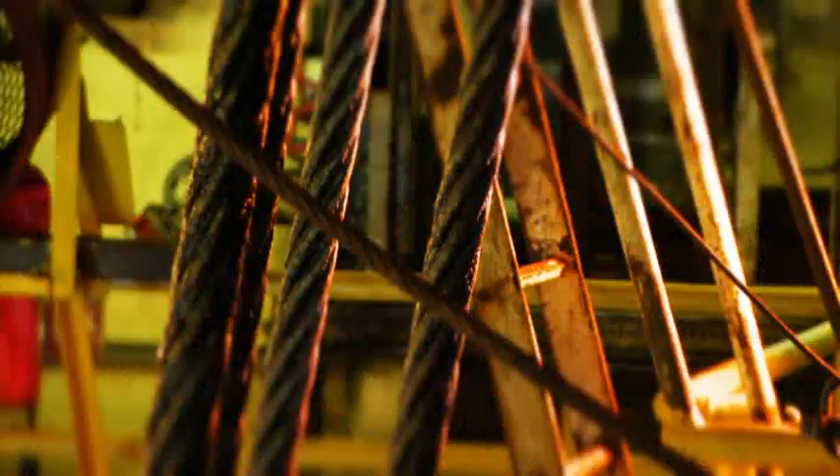For several decades, exploration teams searched for significant reserves of oil off the coast of Ghana. And what they finally found exceeded all expectations: one of the largest oil fields ever discovered in West African waters.

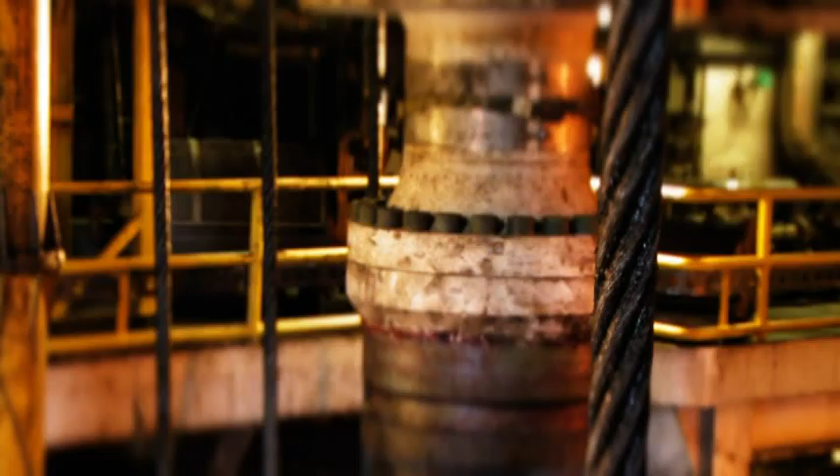The results that we were getting from the initial well that was drilled were very exciting, very thick reservoirs. I do believe we have an outstanding field here, maybe the best field I've ever worked on. It was a really neat well when it came on and when we DST'd it. Good flow rates, good reservoir quality. Everybody around here was very excited.

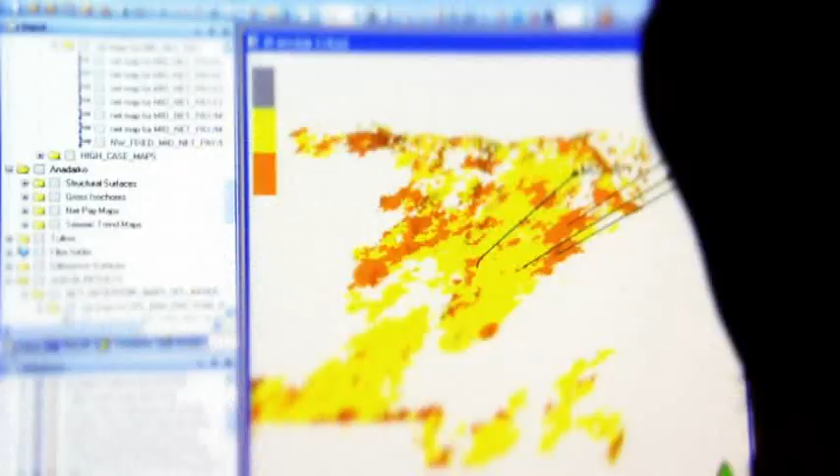Three years later, and the reservoir is poised to surrender first oil. We realized we had a sequence of reservoirs, stacked horizons that spanned 12 kilometers. These reservoirs are capable of anywhere from 15 to 25 or 30,000 barrels per day.

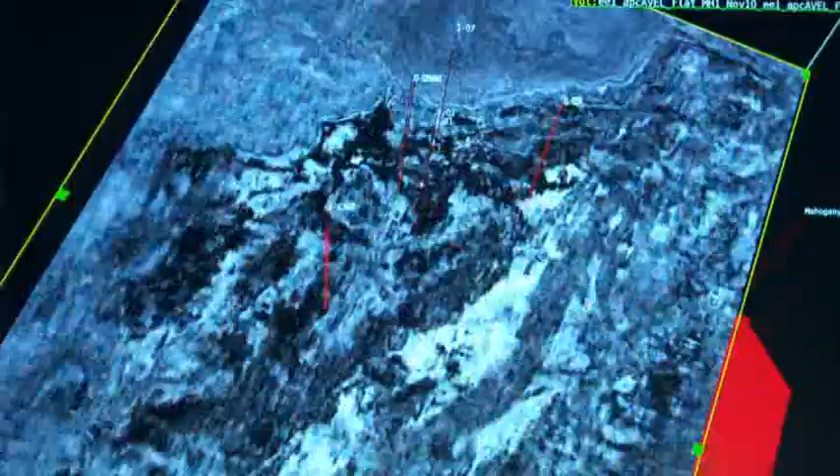This oil is probably the most ideal oil you can have. Compared to heavy oils or sour oils, it's great quality crude. The 23rd of June 2007 marks the discovery of this remarkable field. It was soon to be named Jubilee, to celebrate 50 years of Ghanaian independence.

Realizing the enormous potential of the find, the decision was taken to fast-track the project to bring the field online as quickly as possible.

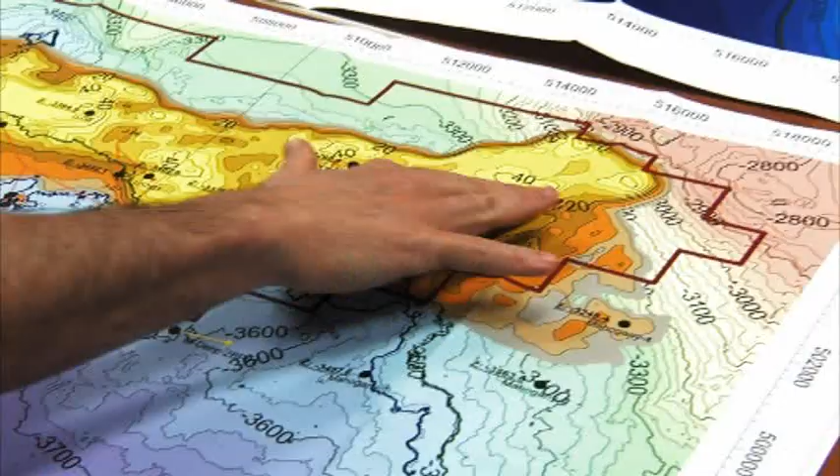The first step was to assemble an IPT, or Integrated Project Team. It was working with three different companies at the same time, all part of that group: Anadarko, Tullow, and Kosmos, in three different locations, without a lot of information, and it needed to be done very quickly and very accurately. We did a very good job of integrating representatives from GNPC, the Ghana National Petroleum Corporation, into the IPT, working with them, establishing guidelines.

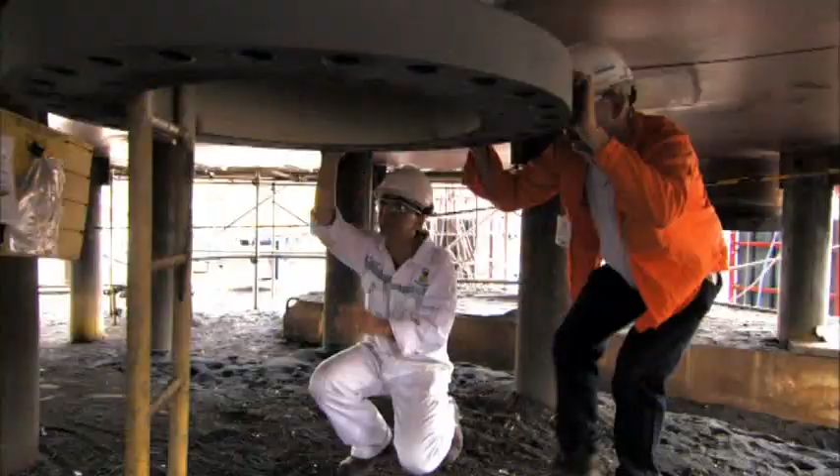The rules and regulations they are now creating are based on our working relationship with GNPC. We went to great lengths to hire the right people. Once we got them on board, we made sure that everybody was communicating with each other. Because we had a lot of good people working on the project across all the parties involved, they very quickly came up with the best solution, which management for all three of the bigger companies and the Ghanaian government were able to buy into.

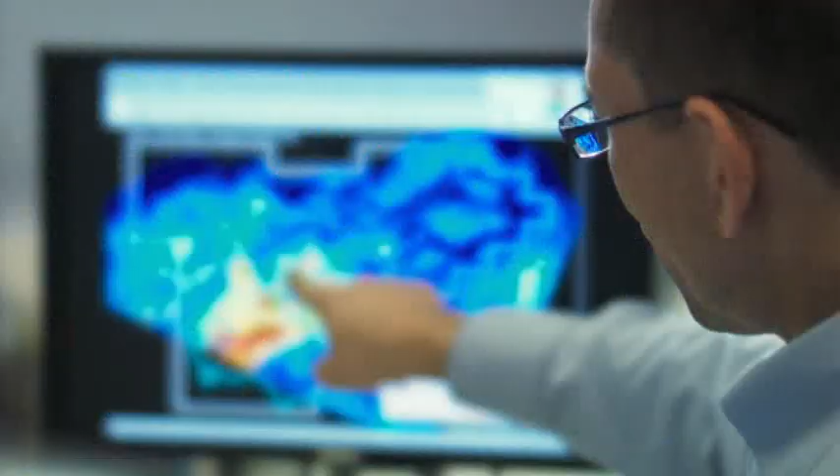Tullow now began building various teams to put their plans into action: its in-country team in Ghana to prepare infrastructure, the drilling team to drill the wells, and later the production team to receive the project from the IPT.

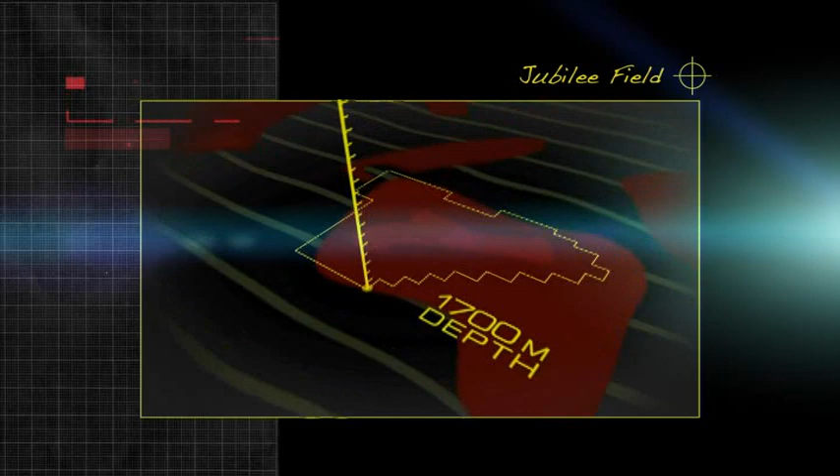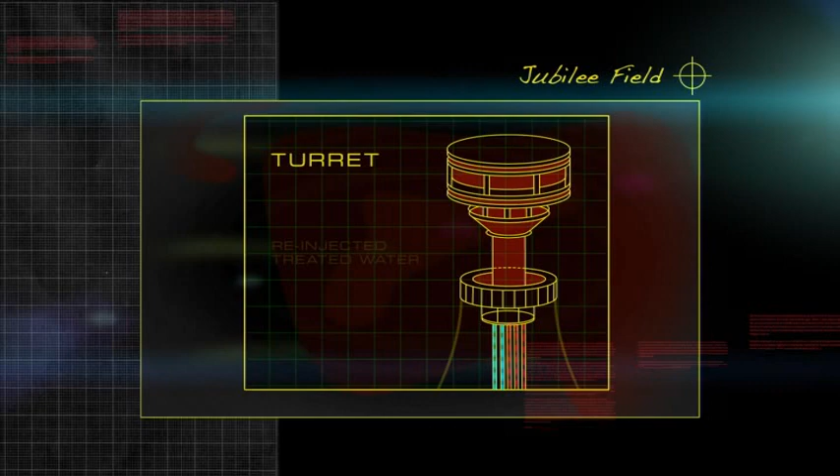At its deepest, the Jubilee Reservoir lies beneath 1,700 meters of water. To bring the hydrocarbons to the surface, the IPT will need to drill as many as 17 wells. As well as those producing oil, there'll be others to inject water and gas back into the reservoir. The purpose of this is to maintain pressure, raise reserve levels, and minimize gas flaring.

It's never an easy problem in 4,000 to 5,000 feet of water, but the industry certainly has learned how to do that well. You simply have to engineer it very carefully. You have to put together very good, proper procedures. And then, of course, you have to have equipment and people that know how to do that. And we did contract among the best contractors in the world.

In the next decade or so, a significant number of additional wells will be drilled, not only to infill the first phase of drilling, but also as we develop other reservoirs that we haven't as yet touched.

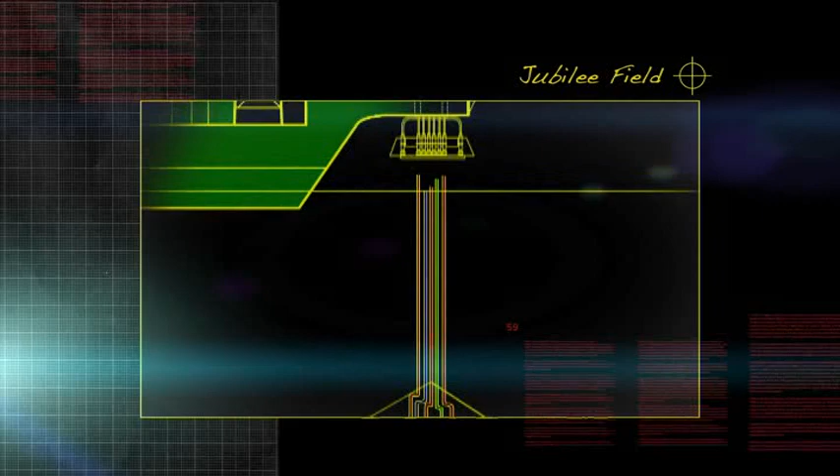On the seabed, the IPT will install a system of Christmas trees and manifolds to control and regulate the flow between the reservoirs and the surface. More than 40 kilometers of flow lines will run along the seabed and up to the surface, delivering well fluids to an FPSO, or floating production storage and offloading unit. Simple enough on paper, but turning this vision into reality would take a massive concerted effort.

Up until this point in time, there was no established oil industry in Ghana. There had been some wells drilled in the 1990s, but none had ever proven to be a commercial success. So for them, this was a whole new chapter. Also, it's an area that was just developing policies and procedures around procurement and customs.

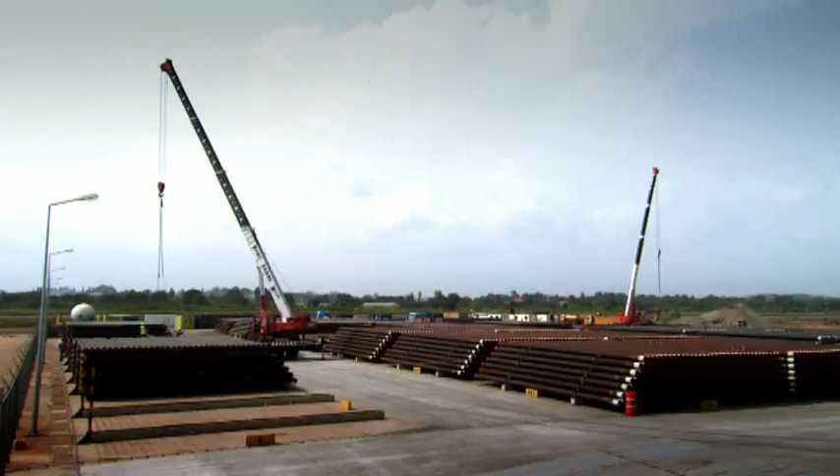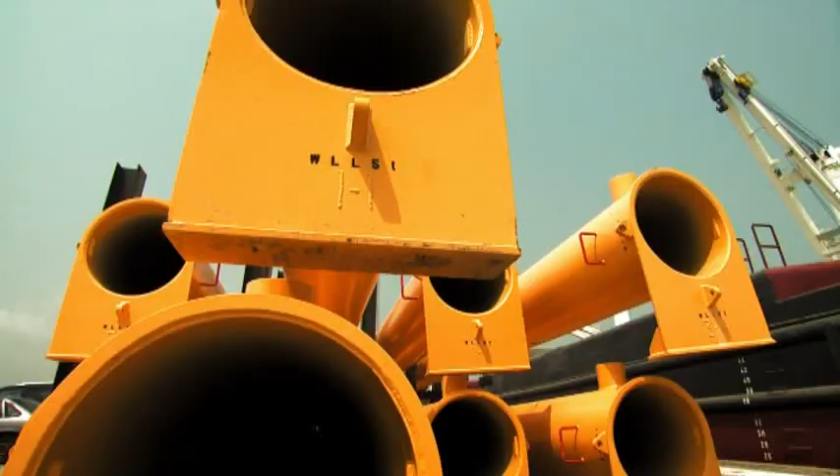One of Tullow's first tasks was to create the infrastructure in Ghana required to support the project. They built new access roads, communication systems, offices and warehouses. Down at Takoradi, we have the Air Force Base, of which we've taken a portion. We've set up a major pipe yard and logistics yard down there. Tullow has done a great job of building a grassroots facility and infrastructure very quickly in a country that had no oil and gas development.

In their commitment to establish a sustainable oil and gas industry in Ghana, Tullow have sought out local graduates who will be trained in every aspect of the oil industry. It's about getting the training and having them positioned such that in a reasonable amount of time, they'll start to contribute a lot more. So we have in excess of 80% of the entire staff who are actually Ghanaians, which is very, very good and speaks to Tullow's commitment.

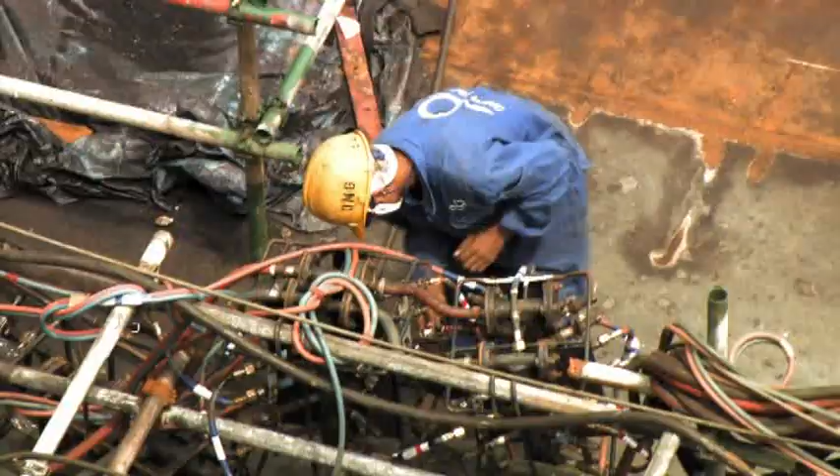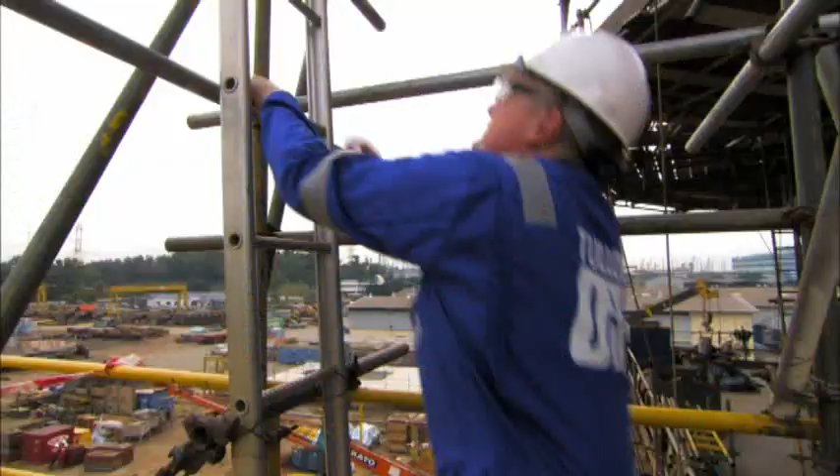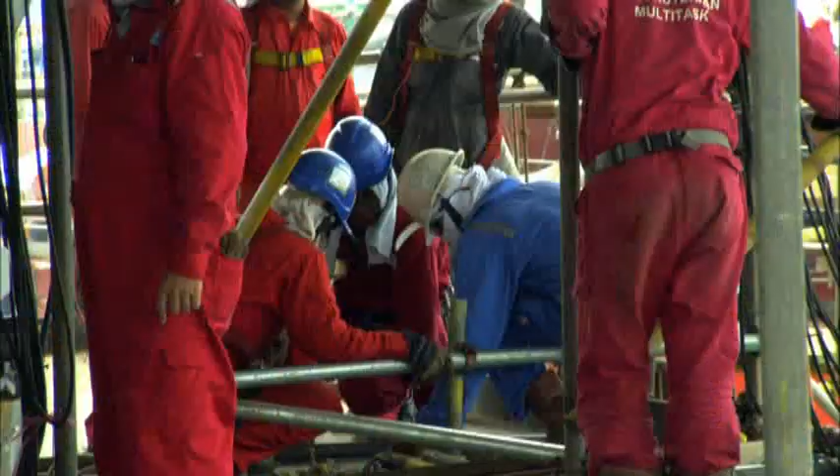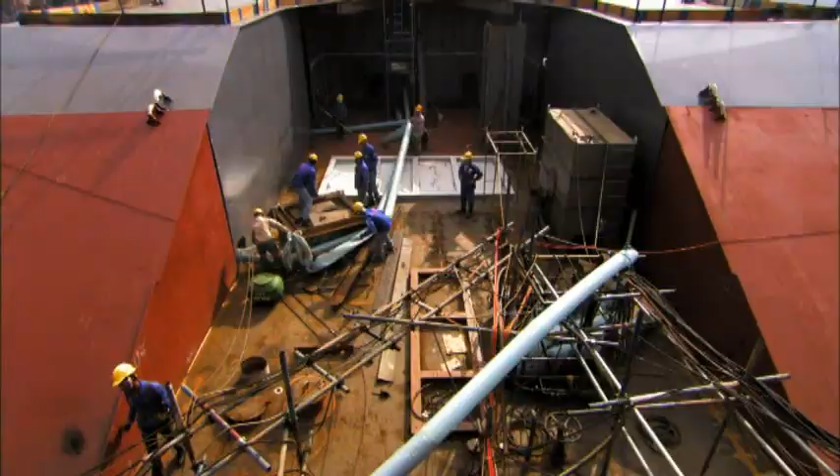My team have had to be in the States, working in Houston with the subsea teams, and in Singapore, where we've had to construct the FPSO at the various factories. The challenge for me and my team has been how do we get a communications plan and how do we work together when we're in so many different work sites around the world. You couldn't do things the way they were typically done in the past. You had to figure out ways to streamline processes, to make better, quicker decisions.

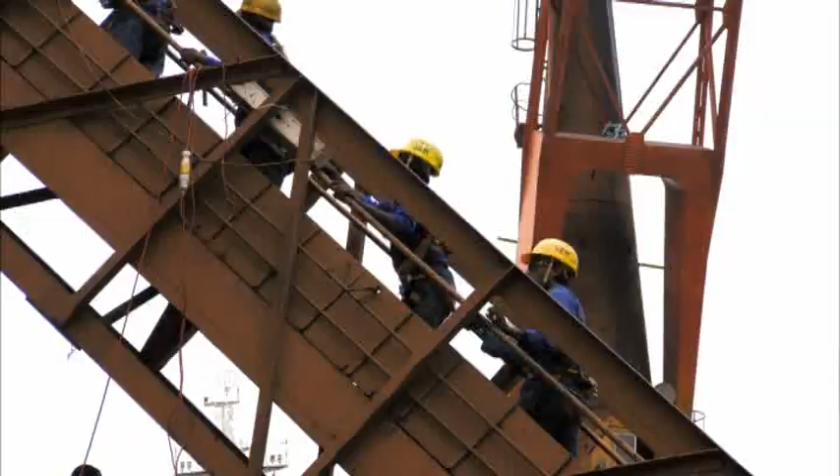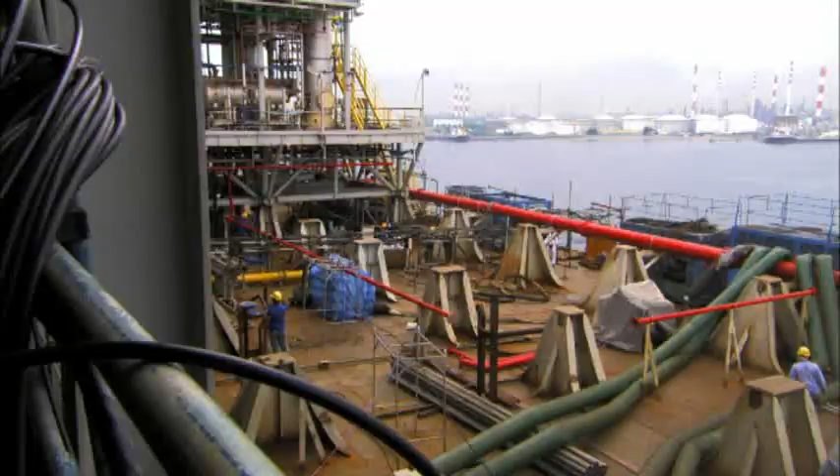This is the Jurong shipyard in Singapore, where Modec have been building the FPSO. To help meet the fast-track schedule, the IPT chose to convert an existing ship rather than create an FPSO from scratch. But the word convert doesn't really do justice to the scale of this operation.

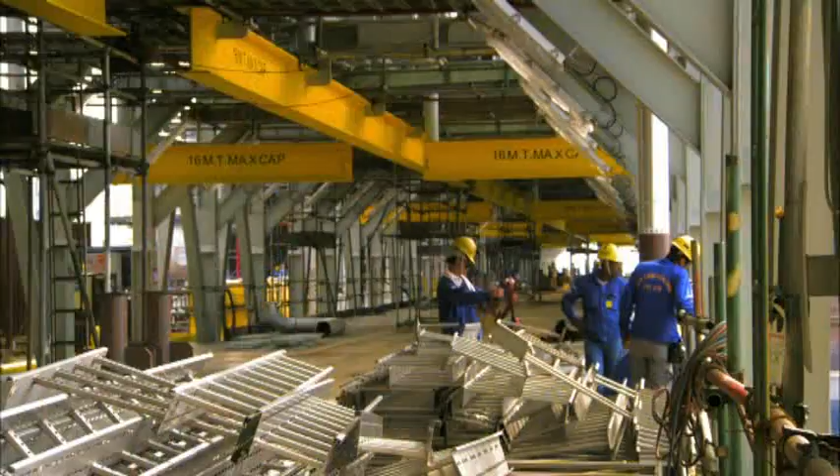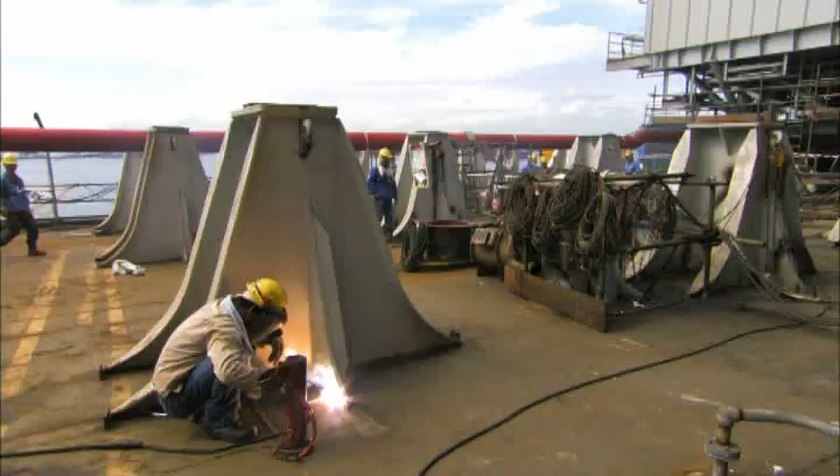Kwame Nkrumah was a trading vessel with a capacity of about 2 million barrels. By the time you convert that, ultimately that leaves us with about 1.6 million barrels of storage capacity. The normal period for an FPSO conversion is about 2 years. We're trying to achieve this in 15 to 16 months. The whole of the vessel's massive 335-meter deck will be filled with processing equipment and utilities.

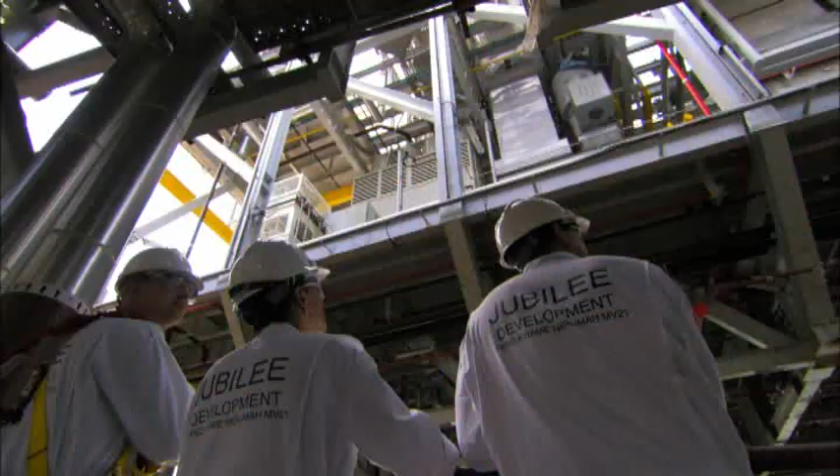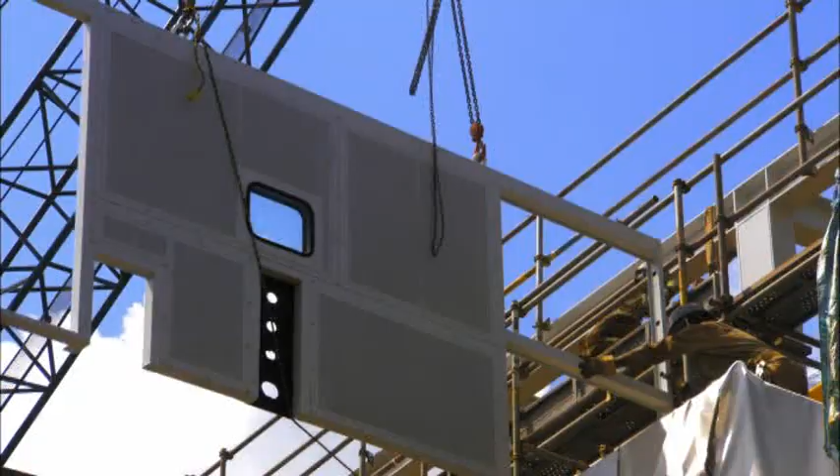Maneuvering each giant complex module into position requires great skill, experience, and a fair amount of time. There are 18 modules in all, with a total weight of more than 13,000 tons. When the modules are in place, they'll turn the former tanker into a floating factory, capable of processing 120,000 barrels of oil and 160 million cubic feet of gas a day.

Knowing that they're on schedule in terms of quality, time, and cost gives me the assurance that there will definitely be first oil come December or last quarter.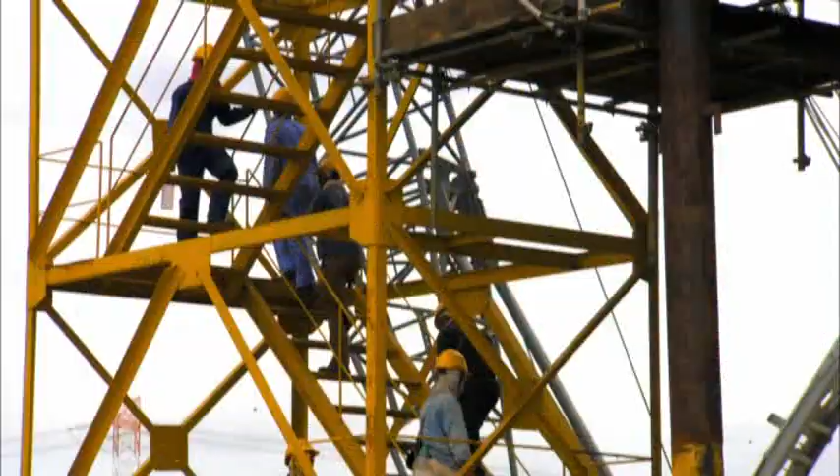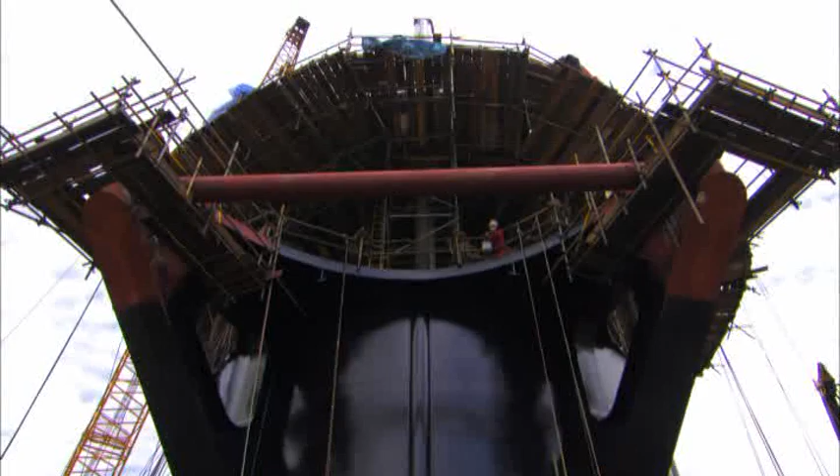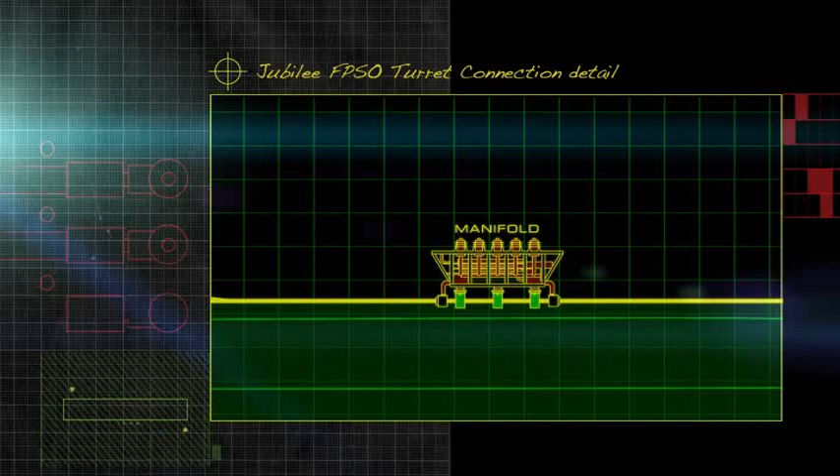Not far away in Malaysia, MMHE have built another of the project's key components, the turret. Mounted on the bow of the FPSO, this will literally play a pivotal role in the production process. The turret is the meeting point between the FPSO and the subsea system. It provides connections for oil, gas, and water, and for the umbilical cables that transmit control signals and hydraulic fluid to the manifolds and wellheads.

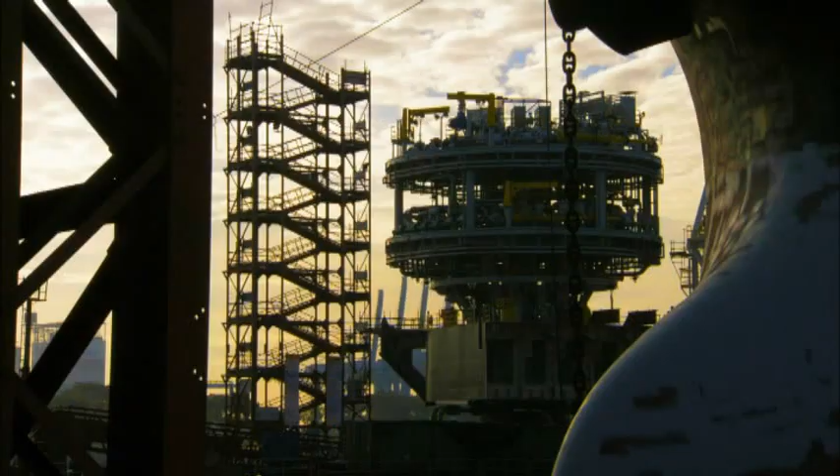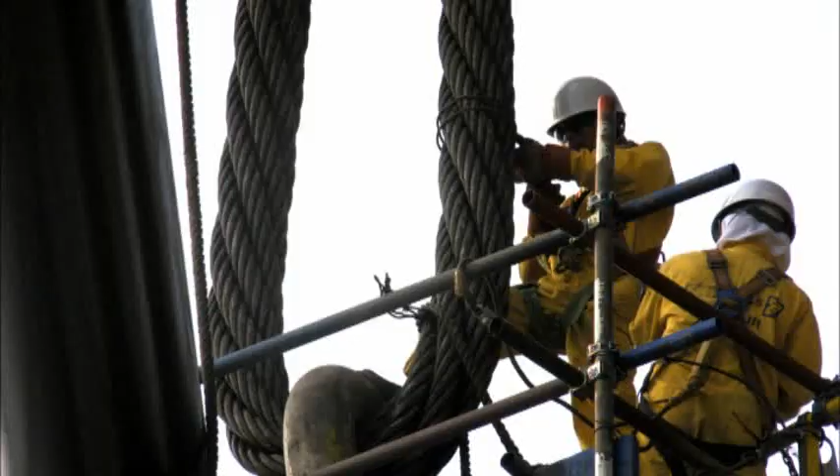The turret forms the pivot around which the FPSO can rotate freely, through 360 degrees if necessary. This means it offers the least possible resistance to the winds and waves in the Gulf of Guinea. The turret is now complete and ready for lifting into position onto the FPSO. At 2,500 tons, it's the biggest lift yet, and the most critical.

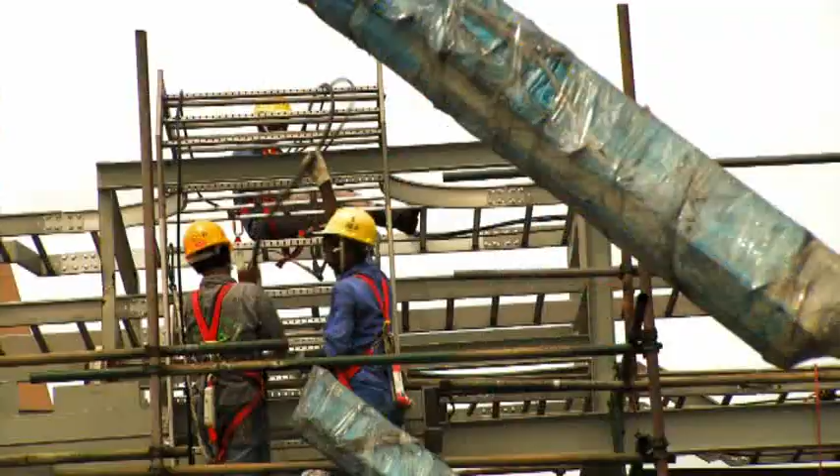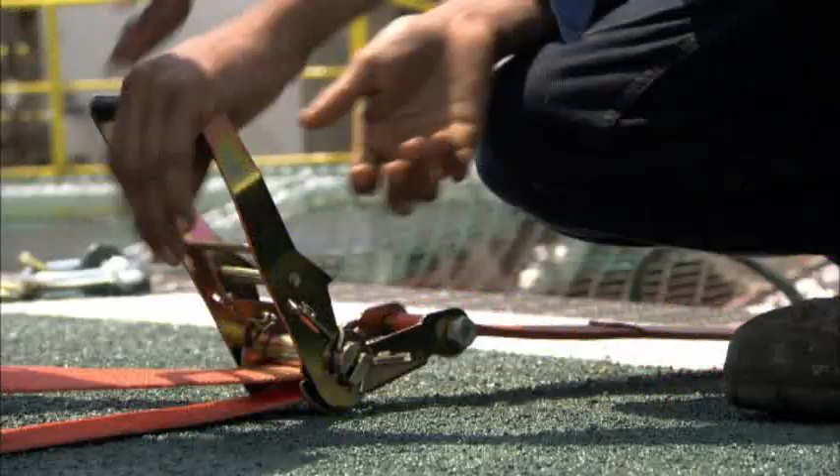The last key component is in place, but the FPSO is far from complete. A huge amount of work has still to be done, much of it below decks and behind the scenes. The aim is to get all the key systems as close as possible to being operational before the FPSO sails away.

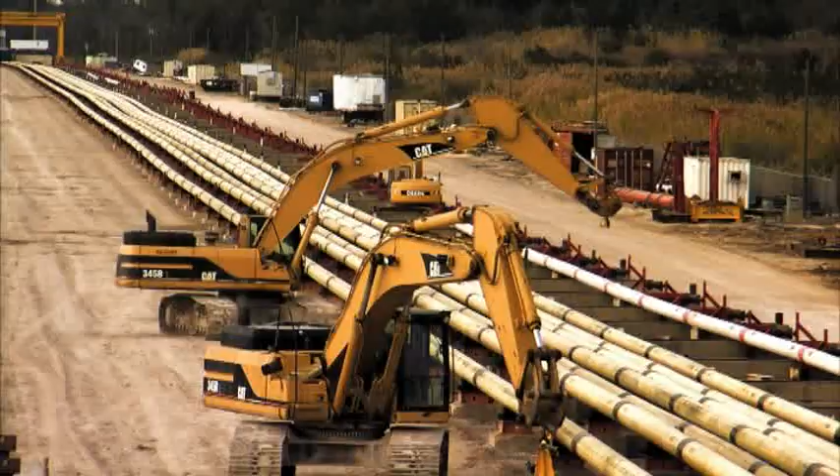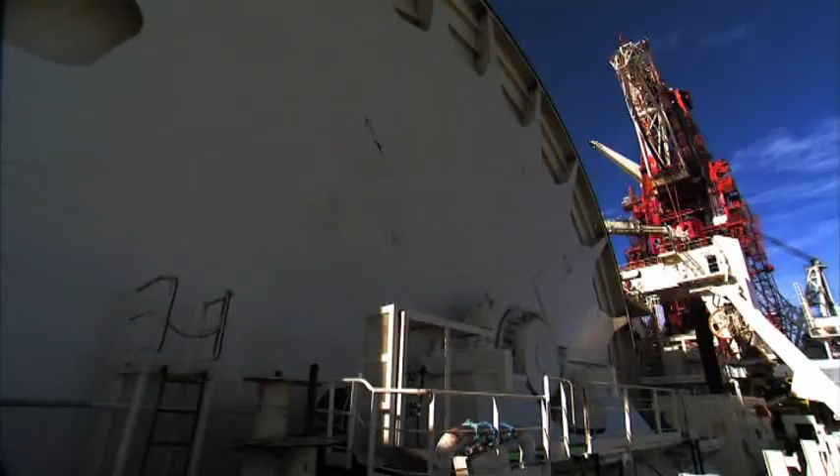On the other side of the world, Jubilee's subsea components are being manufactured and tested before being transported to the field. We're in Mobile to spool the flow line for the subsea development activities, get it onto the Deep Blue, and then get it started toward Ghana.

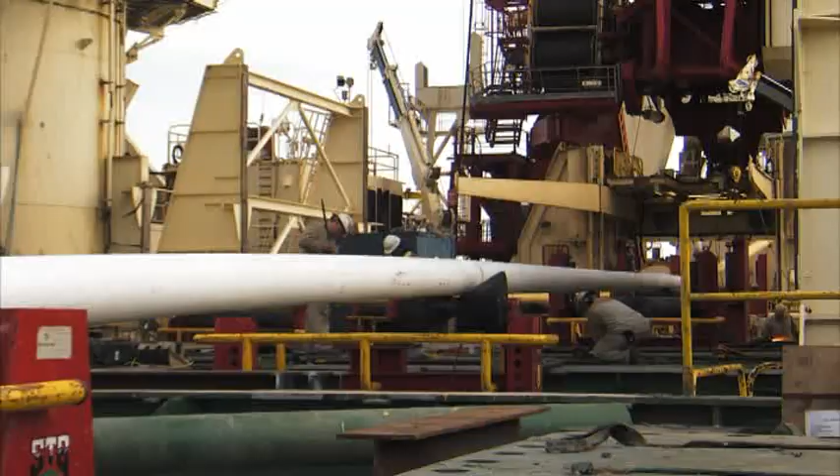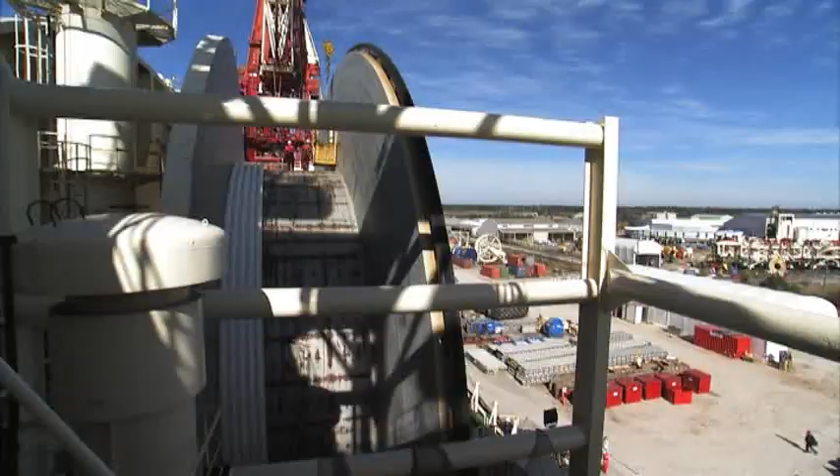The pipeline's been fabricated into 1,400-metre long stalks on the base, which are stored in the ready racks, and they get welded together in the tie-in shed, then spooled onto the Deep Blue. Because of logistical and timing issues, it made sense to split the spooling of the pipe, part of it here in Mobile and part in Angola at Technip's base there.

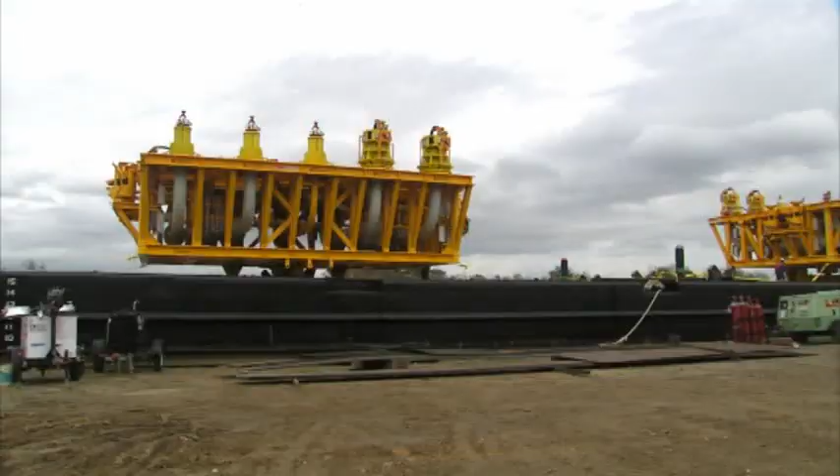In Houston, Texas, Spitzer Industries are overseeing the fabrication of the subsea manifolds. It's gone extremely well considering we're bringing pieces of equipment in from Norway and from Italy, getting it all here and being able to integrate it into the fabrication schedule, getting it all done in a timely fashion. This has been fantastic.

The FPSO is now ready to be launched, but before it leaves dock, it needs a proper name.

Here to do the honors is Ghana's First Lady, Mrs. Naadu Mills.

Kwame Nkrumah, an appropriate name, as Ghana's first president, Dr. Nkrumah played a key role in developing the country's energy supplies, paving the way for industrialization and economic growth. Discovered 50 years after he took office, the Jubilee field will take Nkrumah's vital work to a new level, and the vessel that bears his name will be right at the heart of Jubilee's operations.

Here am I, looking at this huge facility as the medium through which we are going to benefit, and for me that is remarkable. It's a sign of good work, it's a sign of real commitment.

Before long, the Kwame Nkrumah is on its way. It's the start of a 14,000-kilometer journey. In 6 weeks, it'll be home in Ghana.

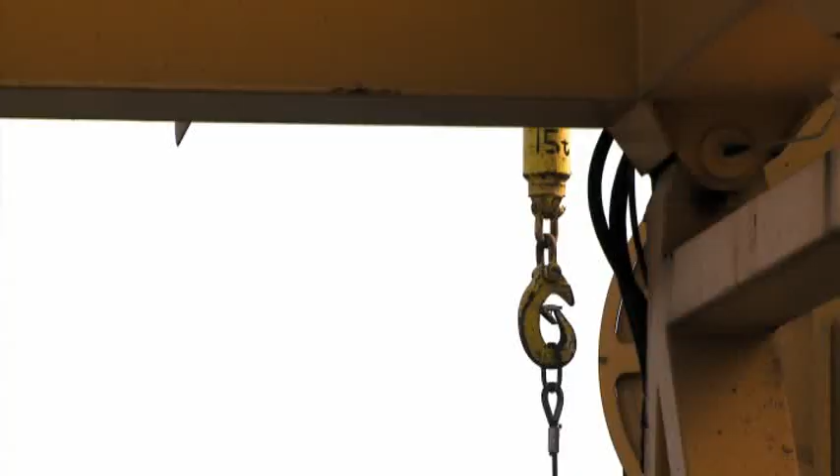Out in the field, the Eirik Raude drilling rig has been at work continuously for over 18 months. The rig is a harsh environment DP vessel, and being DP helps quite a bit. It improved our efficiencies tremendously. We could move from well to well without having to run and pull the riser completely.

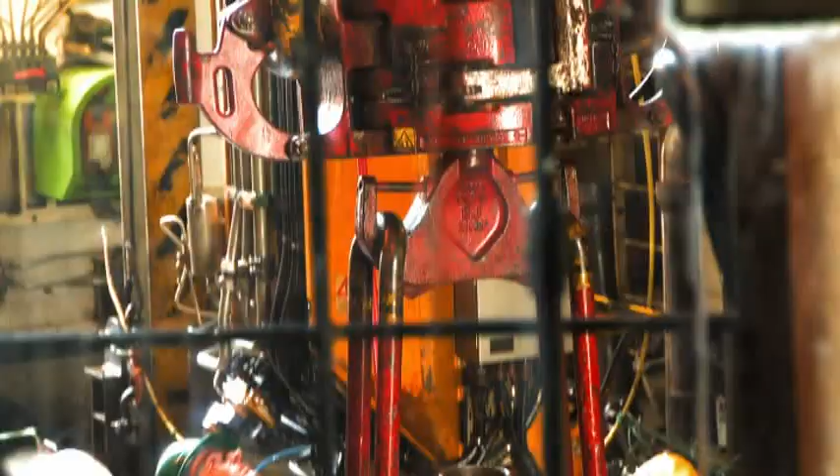The Eirik Raude is a state-of-the-art, 5th-generation semi-submersible, and it's already drilled 16 of the wells planned for the Jubilee field. When you look at the well density in comparison to the size of the field, you realize it's between 1 and 1.5 kilometers between wells, which is pretty significant.

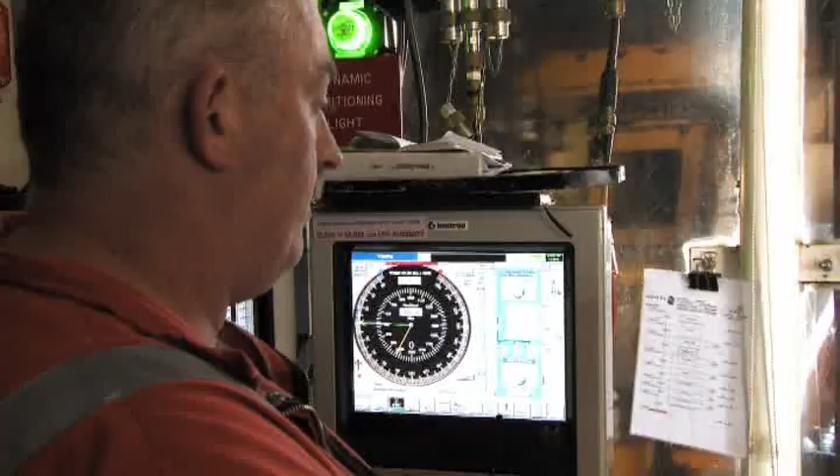We've got 16 wells drilled to date. We still have one left to do. We're in the completion phase now, and there will be subsequent phases as well. They're working out exactly how many wells now, but it's a huge, huge field.

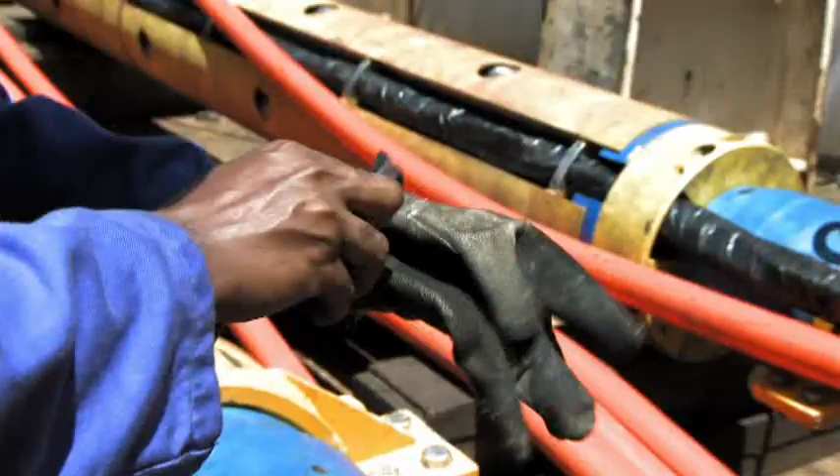What we're now doing is moving into another phase which we call completions, and it's effectively putting in the plumbing that actually allows the oil to flow to the seabed.

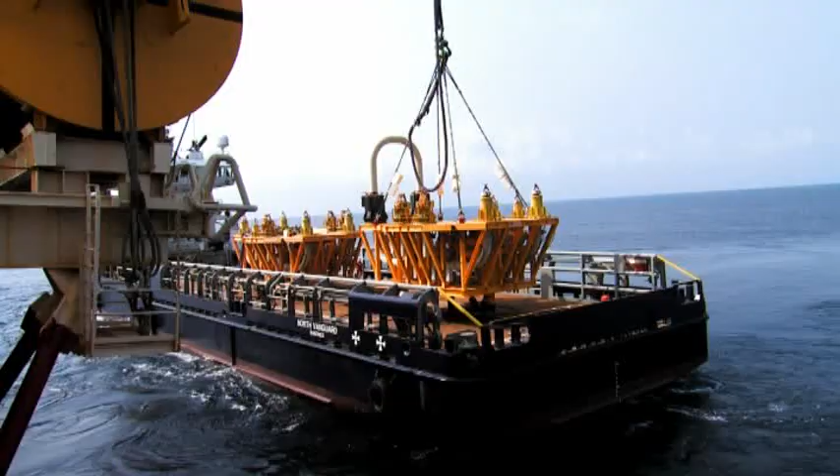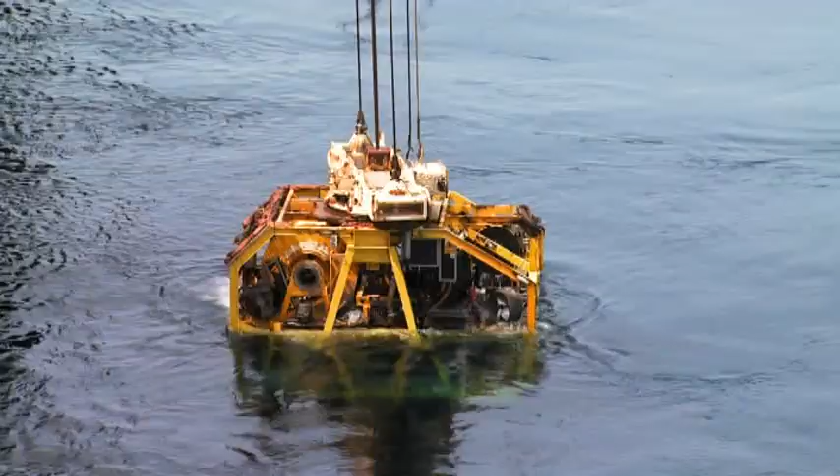Installation coordinated by the IPT is already well underway. Teams have been out here for some months, putting in place the flow lines, umbilical cables, the trees and manifolds. These manifolds have to be lowered down to the seabed, nudged accurately into position and locked firmly into place. Subsea installation is a massive operation in its own right, demanding a supporting fleet of up to 14 vessels.

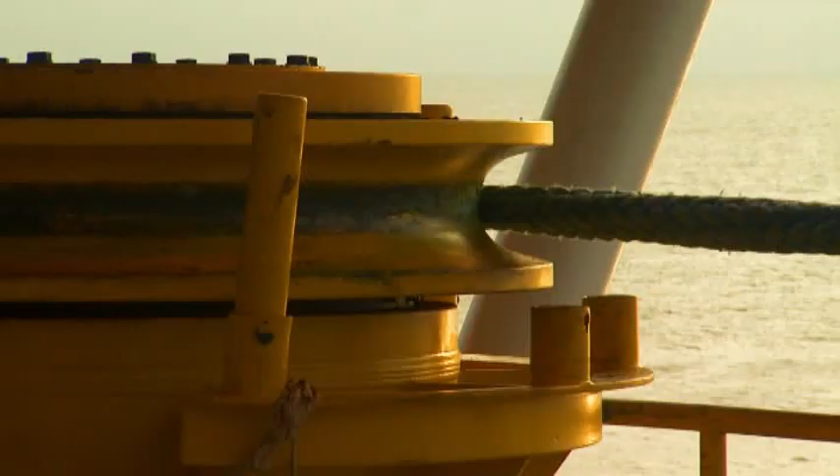High summer, and the Kwame Nkrumah has arrived on site. The installation teams must now work quickly to hook up the network of chain and cable that has already been anchored to the seabed. One by one, the chains are pulled up into the turret.

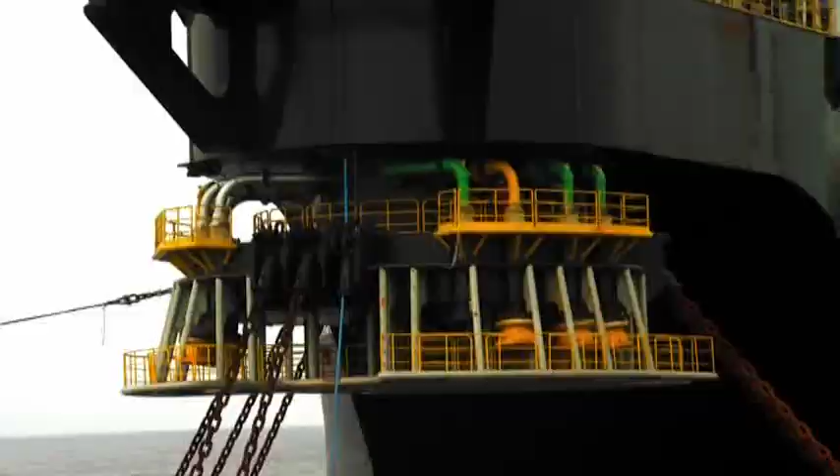Back on shore, the IPT meet once again to check the progress is still on track. Today we held our final planning meeting before first oil. This was really the opportunity to make sure that we haven't missed anything leading up to first oil.

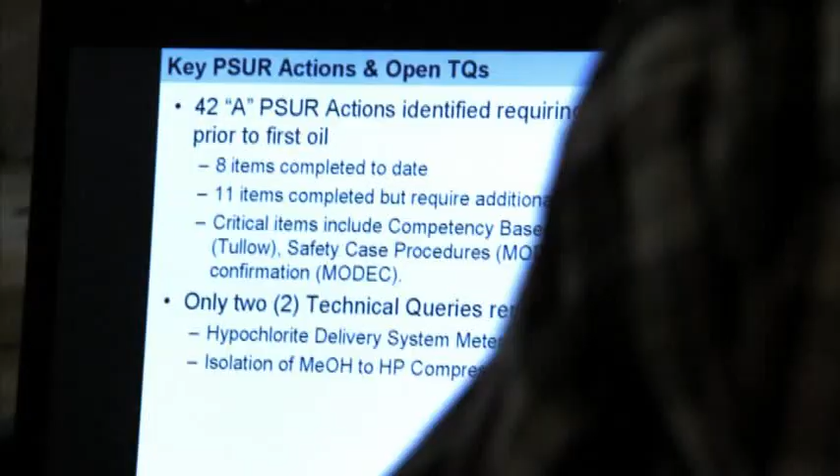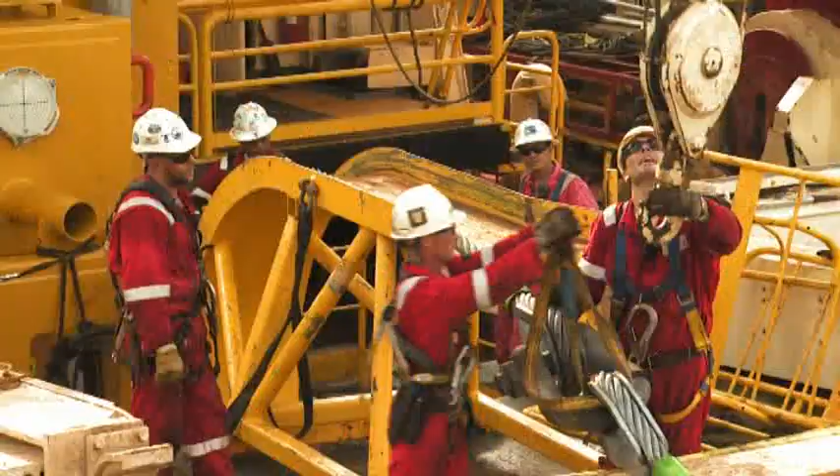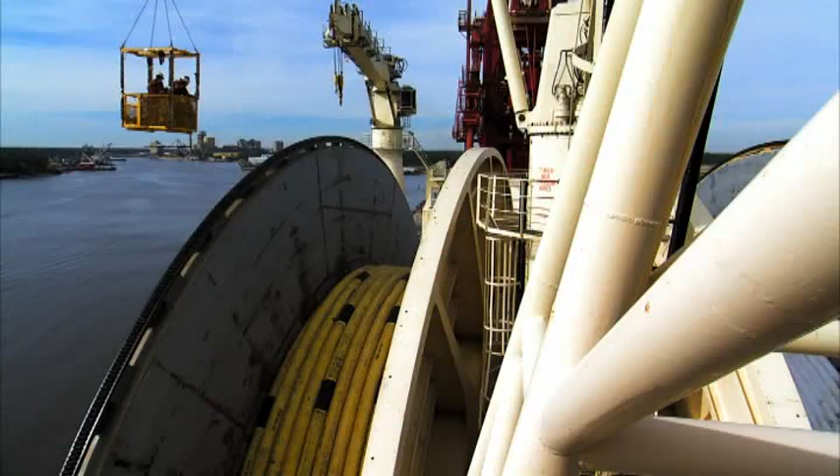It's taken only 2 years to bring the project this far, with an outstanding safety record. We had a very aggressive program we had to deliver to, but at no time did we ever compromise on safety of people. The guys working in fabrication yards and doing the installations of all the various bits of equipment are far more exposed to dangerous things than we are here. It's obviously critical for all companies involved to have a well-developed safety culture, but there's always room for improvement, even with outstanding performances.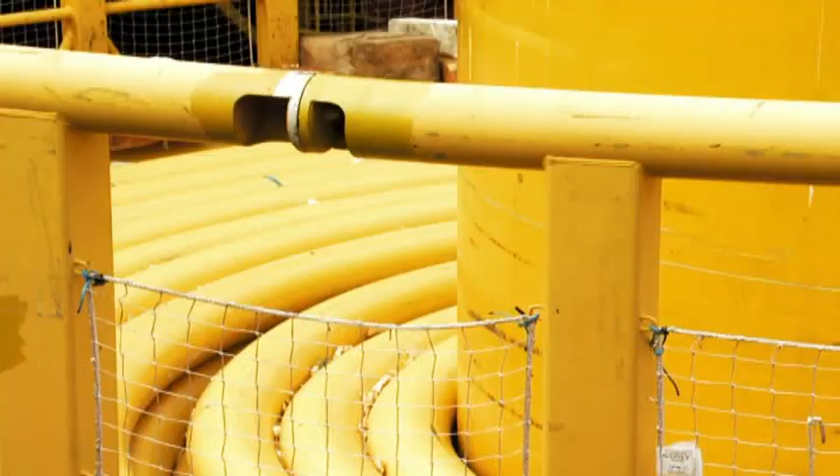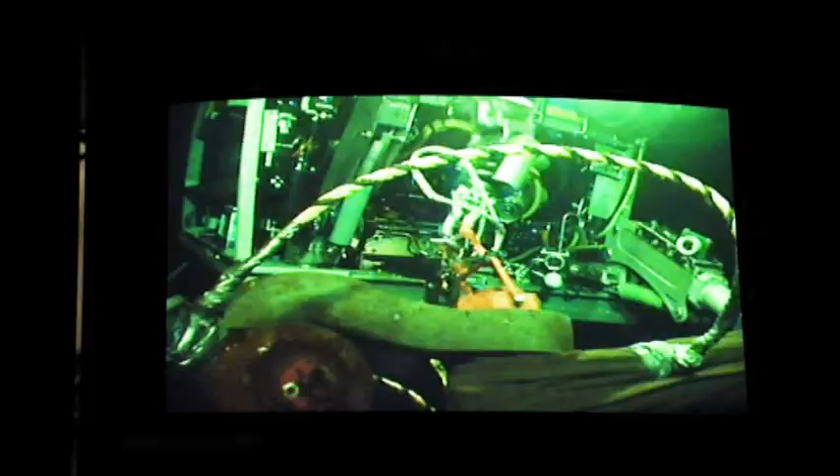Everyone is determined not to let the pace slacken now. Out in the field, the next phase of installation is already underway. This is one of the risers that will lift Jubilee's hydrocarbons up to the FPSO. One after another, the bottom end of each riser has to be lifted up and lowered down to the seabed. Then the ROVs take over, steering the riser ends to the connectors on the pipeline end manifold and locking them into position.

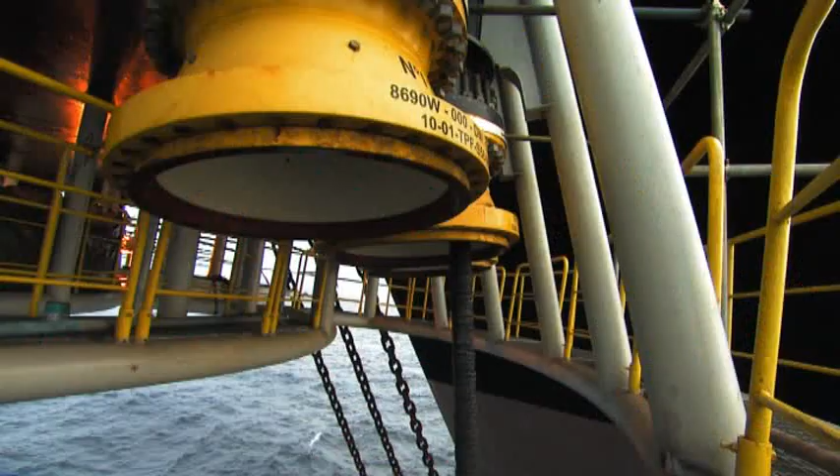Back on the surface, the Technip team on the Deep Pioneer now spool out great lengths of flowlines meter by meter, bringing the riser back up through the water column.

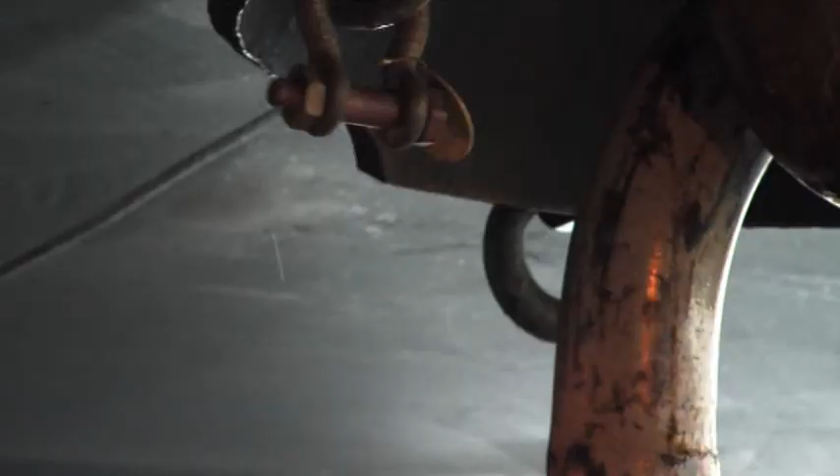Finally, the last riser is pulled up into the turret and clamped into place. A dramatic and significant milestone, with the giant ship and the reservoir finally connected and ready to deliver first oil.

By the end of 2010, the first of Jubilee's oil will be flowing into the Kwame Nkrumah. It's not much more than 3 years since the field was discovered, a record time for delivery of a major deep-water development. It seemed incredible going back 2 years ago that we would be looking at this asset producing first oil in the fourth quarter of 2010.

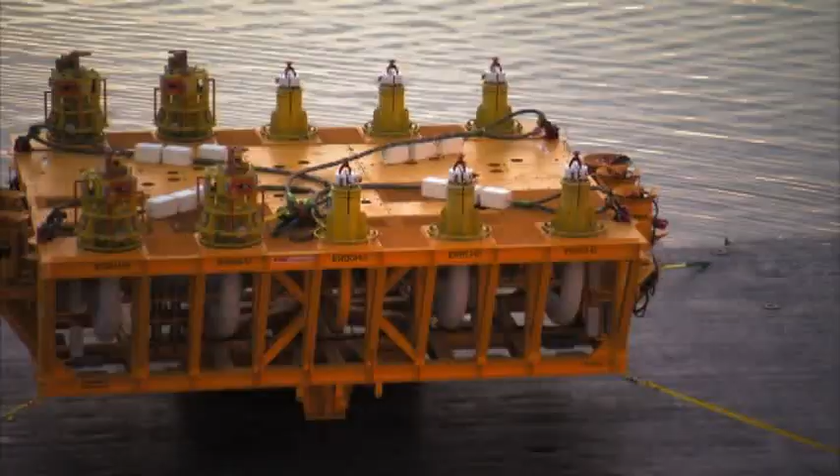There were many, many people in the industry that did not think we were going to be able to do this. This seemed like a mission impossible. The Jubilee field came online on the 28th of November. We started off from nothing in 2007, and to deliver first oil, to me, is absolutely amazing.

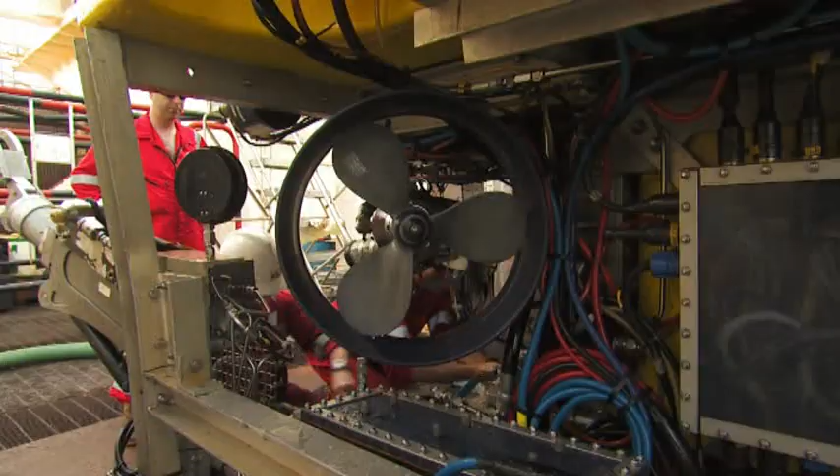Let me tell you what I look forward to. When engineers have finished everything, tested, turned all the taps and everything goes well, and for us to tell the whole world that Ghana is an oil-producing country.

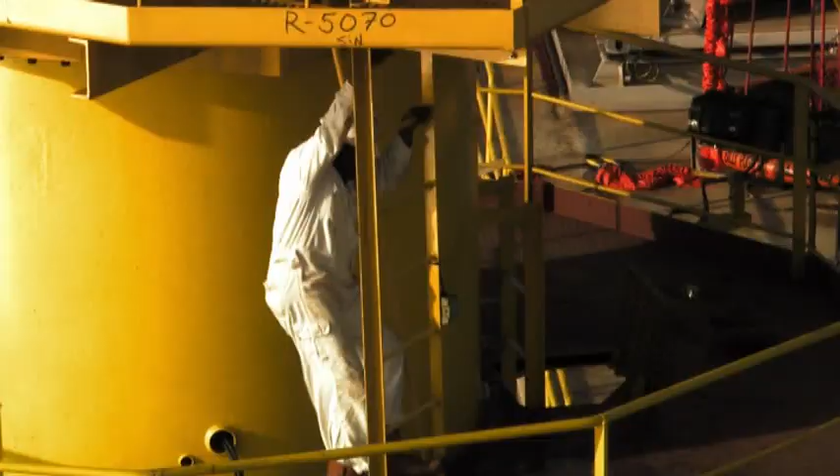It's the end of an exceptional chapter for everyone involved in this remarkable project. But it's just the start of Jubilee's story. In the coming years, the energy it sends ashore will have a profound impact on Ghana's industry and economy, and help improve the lives of its people.

We're very proud of the achievement that we've delivered, but to do it for a country like Ghana, to give them a revenue stream, to give them an energy resource is something we're extremely proud of. It's almost a moral obligation to ensure this great gift from God is actually used to the benefit of everyone in the country.

The communication and coordination of all the activities was really key to the success here. I met some really fine individuals that I think will be friends of mine for the rest of my life. We've had real cultural variation in this project, and it's been really good to hear, 'oh, you don't have to do it that way, it can be done a different way.'

With the right team, with the right attitude, with the right support, anything can be done. We've achieved the impossible. It would be one giant step for Ghana, and for Ghana to become maybe one of the greatest oil-producing countries in the world.

In some ways, yes, we walk away, but we also know that we've left it in good hands. We've worked with a group of people that know what they're doing, and everybody's satisfied that together we've done a really, really good job.